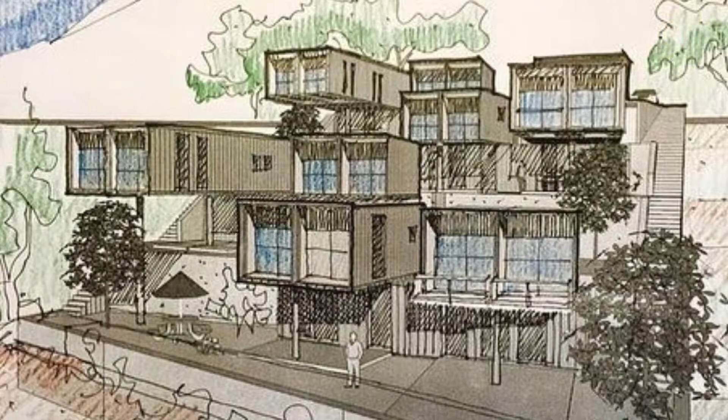We have with us today architect Madhav Joshi, the founder of an architectural and urban planning firm based in Pune called Architect Madhav Joshi and Associates. He graduated in architecture from BKPS College of Architecture, Pune, did his post-graduation in urban planning from IIT Kharagpur, and then established his firm in 1998. His firm is a hub of architectural creativity, designing projects that explore new frontiers of contextual modernism as a consciously adopted approach rather than a style.

I'm actually pleased to put the emblem of College of Architecture, which is a deemed university now. You are blessed with a wonderful campus. I mean, at one time...

You can consider this as the beginning of my presentation anyway. It's not going to be very formal, loaded with a lot of terms and terminologies of architecture.

I tried at both the places, but in the interview at JJ, I don't remember who was there, but some of the terminologies I was not familiar with, such as what is RCC, what is an eave, and what is a rafter. Some questions were asked and probably I failed because of that. But nonetheless, I was lucky to get admission at BKPS, and I carried on my quest to study architecture there.

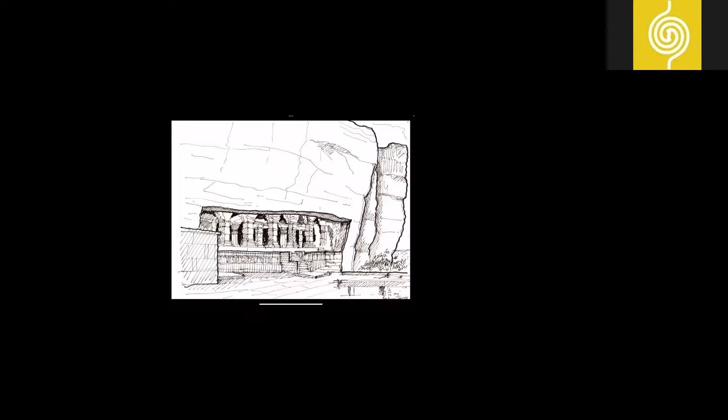Then you travel - this is Badami - and you're tempted to do your own documentation by sketching. Photography is one way, but sketching takes you to another level because you try to connect and get challenged by what was created earlier. Mere sketching is difficult, leave alone doing it again, but that leaves you inspired when you leave that place, and you come back with greater challenges in your mind to create something better nonetheless.

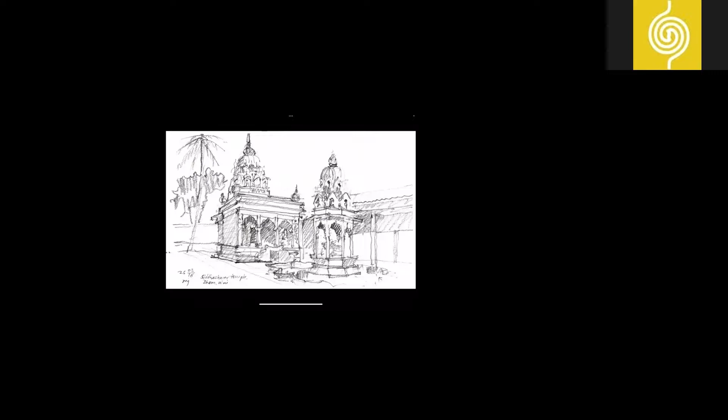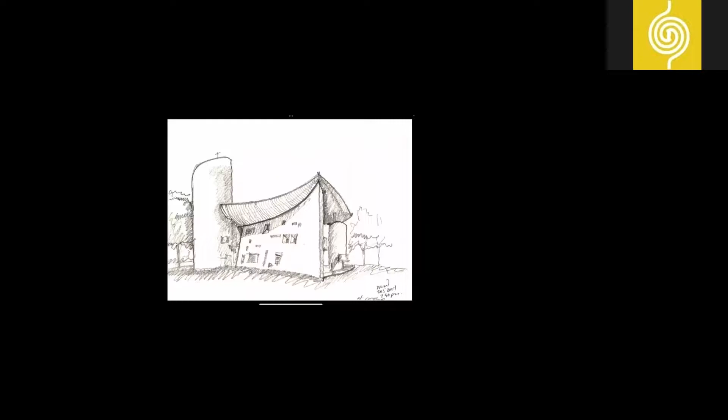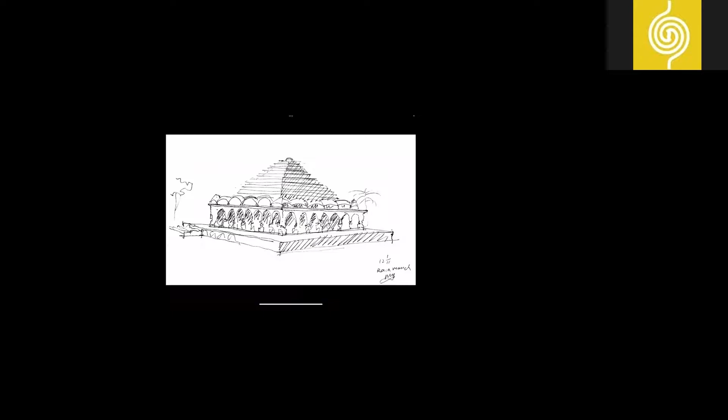This is everybody's dream, to go travel and see these wonderful buildings once in a lifetime, and when you go there, you can't come back without a sketch. When you sit there and start drawing, you realize how wonderfully it was crafted and designed.

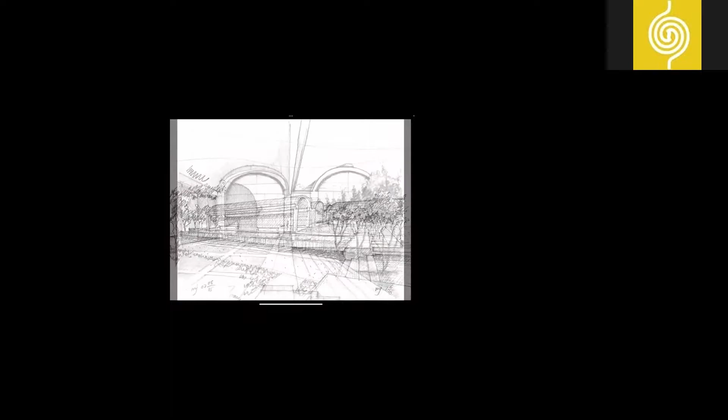This is Salk Institute by Kahn, this is Kimbell Art Museum, this is Carpenter Center. So likewise, you travel, you tend to sketch, and you consolidate your notions about those buildings which you've mostly seen in magazines and books. But seeing them and experiencing the spaces corrects all those notions in terms of its space, its scale, and if you're able to sketch it down to reasonable proportions, it's a very happy conclusion to that entire quest of exploration.

With these learnings, when you start designing certain projects, you're always in search of a concept, which I refer to here as the birth of an idea. For example, there was one project, a weekend house in the outskirts of Pune, with wonderful surroundings. For a weekend house, why do you go there in the first place - because you want to connect with nature.

We have an interesting process in our studio where at the end of all this design, or at the beginning of the design discussion, we try to capture what we want to do in a one-liner as far as possible. So here you'll find one-liners for every project, which in a way talk about the USP of that project.

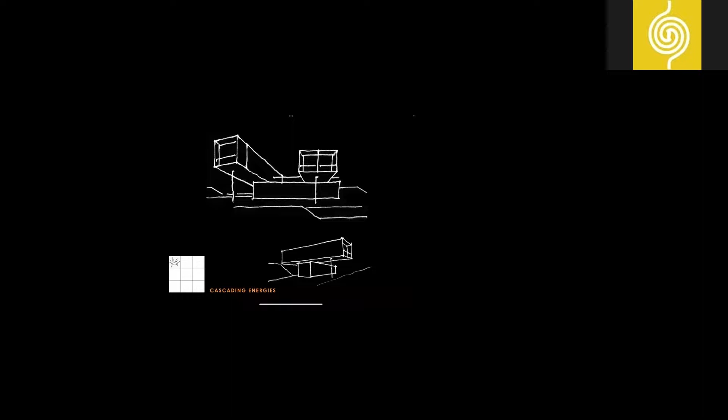Or for that matter, some other project where we are going to deal with extreme difficult slopes, and it was going to be a place for youth. We thought this would be a wonderful way to capture that idea, which is cascading energies. And that's manifested in the design.

Or for that matter, when you are asked to design a campus in a pristine setting which doesn't have very glamorous views or a seafront or dynamic views, but simple hills and undulated terrain around it—that's all you have to respond to, and that also has a lot to offer you.

But the important realization is that you're going to intervene into that pristine natural setting. So instead of looking at your building as an object which can stand out, you want to look at your architecture as an object in the landscape itself. Ultimately you want to intervene and give back to nature. That was the notion one started with on one of the projects.

Or for that matter, if you're doing something in a larger campus with a set of buildings, we thought we are working within a larger campus and we actually want to create a precinct within that campus. So a campus within a campus, or a precinct within a campus, was the tagline for one institutional project.

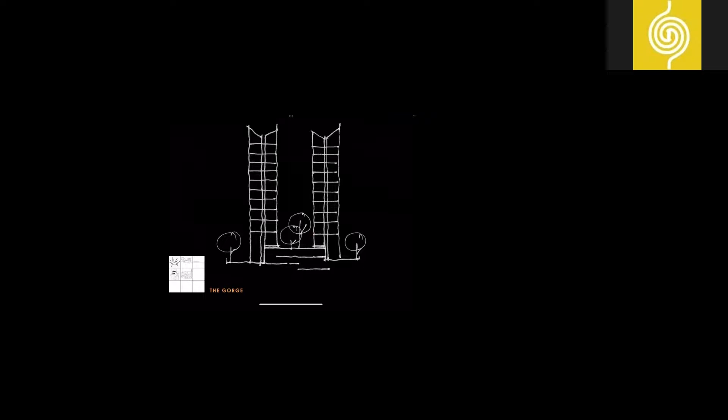In urban context there are residential towers, and what happens at the bottom is the public areas or the podium, which can bring public life together. So this is the gorge that we are looking at, and these are the high edges of the cliff.

Or a simple thing like how you arrive at a place also defines the entire experience, because that is where the experience begins. So for any building, arrival is very important. But here we wanted to highlight it because we are dealing with a campus with buildings of two different purposes—one a hotel building and the other an office building—and both wanted to have their own identity in terms of arrival.

So delineating the arrival was the guiding line when we started organizing the entire campus.

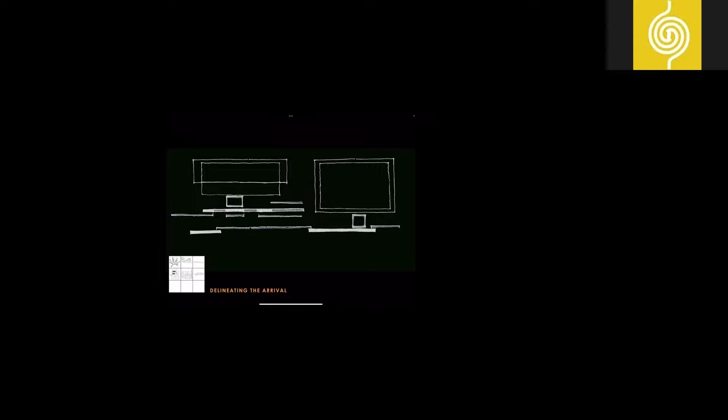Creating an urbane workplace is a very common dilemma. Nowadays we can see the skyline of Bombay changing rapidly, with taller and taller buildings coming up. But there was a time when we started designing a large mixed-use development on 12.5 acres, and the question was whether to go high-rise or horizontal.

On the left side is the hotel building, shown proportionately in terms of building bulk compared to what would be the office space. The choices we exercised, and why we did what we did, are represented in this diagram.

If you focus on the hotel building, this is what happens—the hotel would not change much, but the office buildings could. We wanted to give office areas equal importance as the hotel without letting them dominate the entire proposition, and to bring the space to a more humane scale where people can relate to its surroundings, instead of intimidating them with taller buildings.

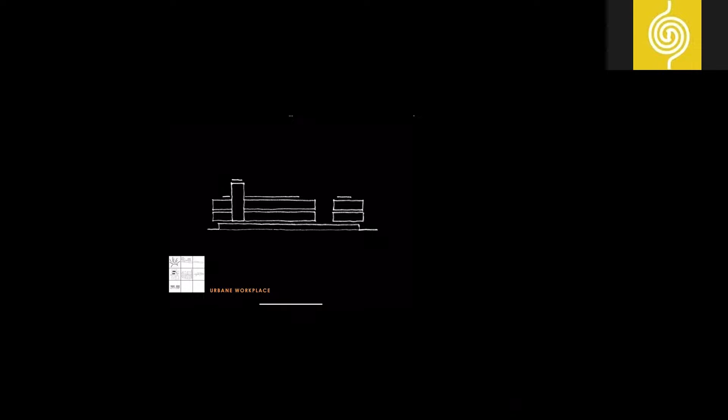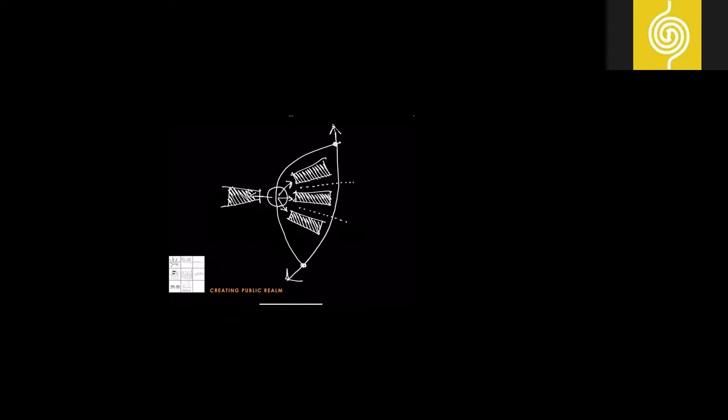When dealing with a larger urban design exercise, like creating a city center for Pimpri-Chinchwad, this was the idea we put on paper first—creating the public realm. That is most important, since this is going to be the destination, being a city center.

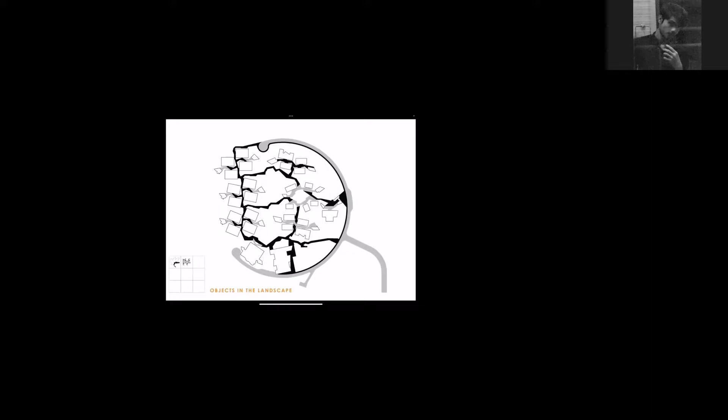So these are conscious attempts to organize the spaces with these thought processes. Traversing is another key element in that process.

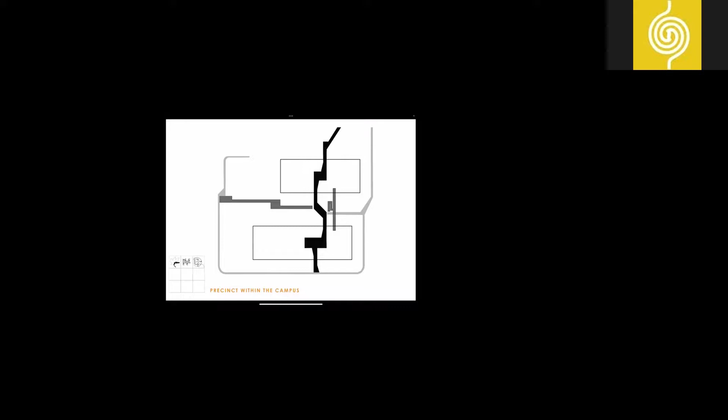Or for that matter, within the campus, when dealing with existing campus, there are surrounding roads where you want to bring people from vehicular movement, or traversing through, with universal accessibility for pedestrians coming from various directions of the campus. Or community clusters, which need to be connected through and through. And this is how the diagram emerges.

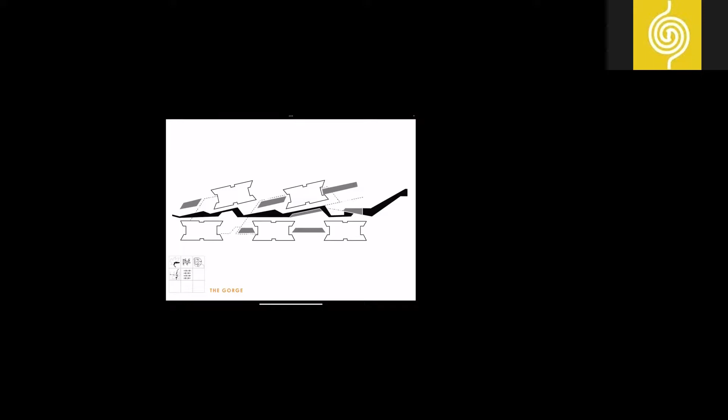The courts that we talked about—the space within the towers is going to be flowing, like a river or stream, with a lot of activity and interaction spaces. Or how you want to delineate the arrivals by putting these walls which define zones of arrival.

Or that large urban workplace where the linear arrangement of the masses defines the overall connectivity pattern. Or for that matter, the city center is more radial because the site was such, and you want one major arrival area but connect to various other points. There are multiple drop-off areas, being a large 35-acre site. So finally, you want to bring people to one particular node from where distribution within the building can happen.

So it's all about organizing man and material movement, vehicular and pedestrian, but there has to be a definite pattern and thought process behind it. We are just trying to capture that more graphically here. When you look at it collectively, this is how the traversing patterns look for various projects.

And this is a very important aspect, the built and the unbuilt. I always believe that the unbuilt defines the built, and we can talk about it more as we go ahead. But here, what is built is the dark portion; what is unbuilt is largely yellow or gray.

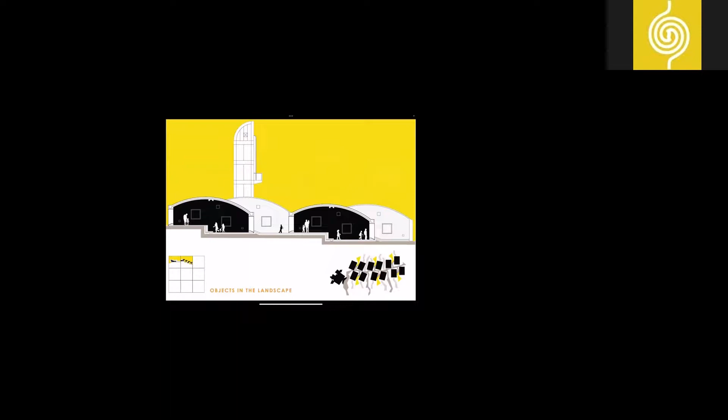And that's true in all the projects, like maybe in a school campus or a backpackers hostel campus or the institute—how people, these are the work areas, and how they are connected, and what happens in between, or how the traversing happens, or for that matter, in the housing areas.

So each of these projects has a definite notion about the built and the unbuilt. For example, if you look at this large space, the large podium space you can see here is a central organizer of the entire place. If you see in that key diagram, this is that space.

It's a large 4-acre podium area, a landscape garden which organizes all these buildings around it—these are the two office blocks and the hotel block. But this is a common central place which defines the entire organization.

So when I say the unbuilt defines the built, there's a conscious call to keep certain areas unbuilt, or typically, a house around a courtyard. The idea of keeping a courtyard is fundamental, and then there are various possibilities around it.

Or for that matter, in a city place, to create open space for people within the building blocks is important—that's a conscious effort, and around that, the built is defined. These are the traversing routes as you saw earlier, but this also gives clarity on where the building blocks are to happen.

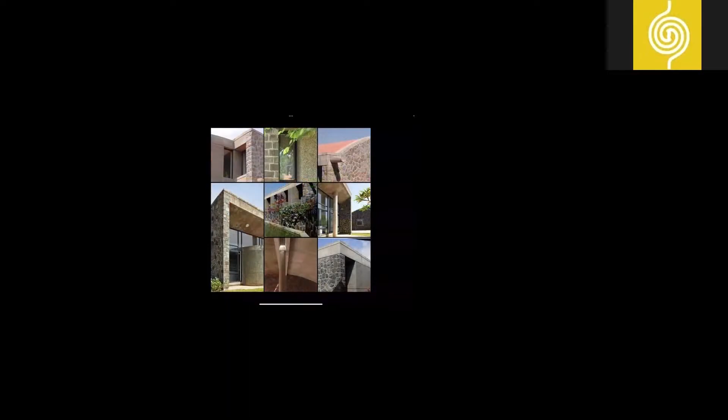We've been dealing with a range of materials, starting from handcrafted stone masonries to industrial elements, or the more modern interpretation of shutter-finish concrete or metal, or good old plastered, rough-textured buildings. What matters is how we look at the fenestration, the interface where different materials come together, and how shadows play an important role in the juxtaposition of projections and recessed elements.

Or for that matter, different materials like water or landscaping — because landscaping needs a very neutral backdrop, and it can do the rest of the drama. Or the new-age materials which have arrived, and which we have to respond to and use very carefully.

So just to summarize, this is what we've been looking at through the examples. All these colored images are what we are going to talk about in detail as we proceed with this presentation. So the first one is capturing the horizon.

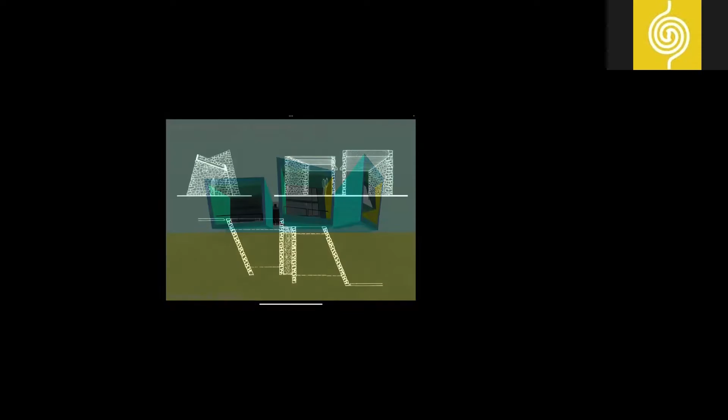It's a weekend house. It's interesting to note that this is my third-year sketch of a larger project, where we were asked to design a city garden, a city park, and this was the entrance gate to that park. There was a small idea about this. Many other objects were designed in that project exercise, but this one actually captured my imagination as I looked at this project when we started practicing.

This entrance gate has simple load-bearing walls juxtaposed at two opposite angles. Looking at it from below going up, from the left-hand side you see a larger picture of the garden, whereas from the right-hand side you focus onto a certain object in the garden. Imagine a kid approaching a park like this — they'd have a choice of going from this side or that, and they'd get a picture frame of the same destination with two completely different frames, which triggers interest before they rush into that area. These are the small things that work on a human mind, which architects are capable of introducing, and that experience of arrival becomes that much more interesting.

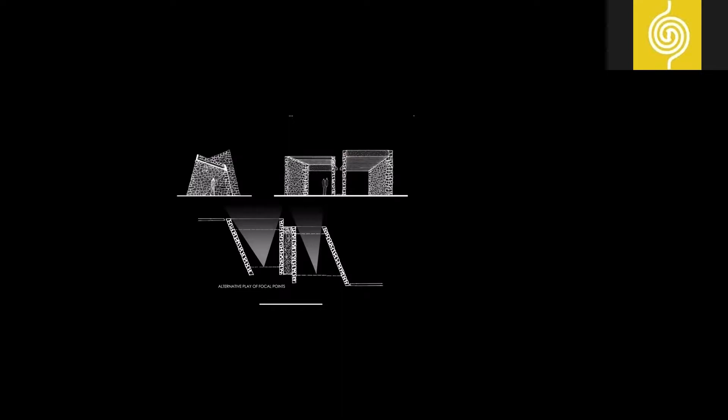We thought this idea could be developed further when responding to this program — we wanted to increase the sky space more, and that angle we saw earlier would offer, for example, this angle. Can you see? And the plan also. There was a view all around, and from every room you could have a wonderful view, so the diagram came about to capture everything around that site. This was the first sketch, looking at the site from outside the site.

That's another way of looking at the project at hand. Normally we look at the site in itself — we study extensively the contours of the site, we study extensively what the program is saying about the site, but very rarely do we see the site from outside. So we thought it was a wonderful idea in a project like this to look at the site from outside and see how best one can respond to it.

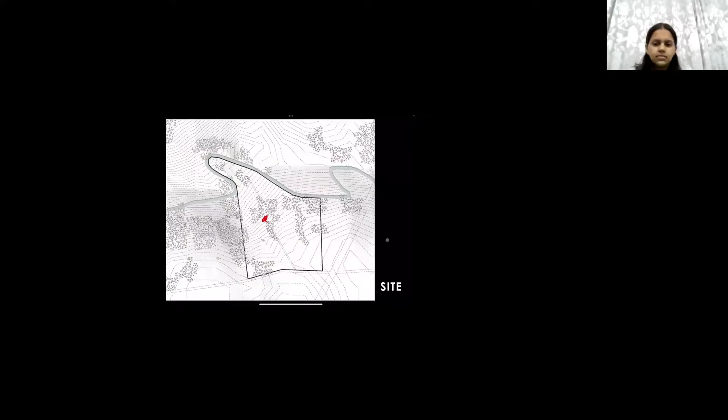So this was the site which was comparatively at a higher position compared to the rest of the farmland. We thought this is the best location because being at the top, the topsoil has already eroded and it's not good for cultivation as such. It would also command a better view into the surroundings. That's how we selected to position the house at that particular location.

So this diagram sort of shows it. There's a gradual slope ending into a small valley, kind of a swell where there's a seasonal flow of water. But otherwise, there is no obstruction of any objects, and you can see till the horizon. That's what you want to capture in the picture frame.

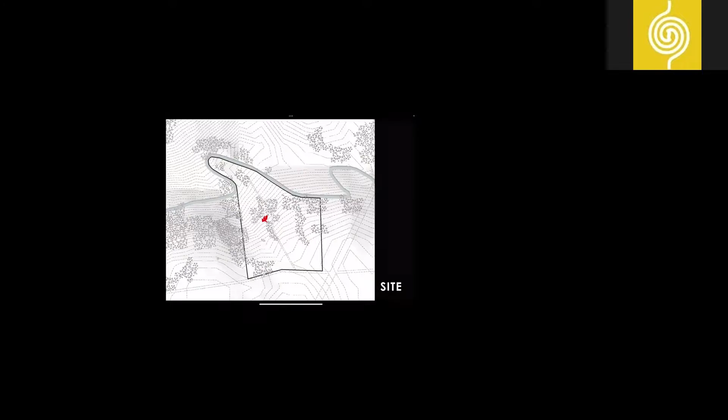And this is how the diagram actually emerged. There's one slide missing, I guess, which talks about how that process came about, but okay, it's there. So starting from the initial sketches on the side, slowly you start to try to make it more and more rational.

The geometry of the plan and the volumes is held by a helical pattern, which establishes a rhythm between the independent moving lines. One wall of each space stretches longer, ensuring visual privacy between the spaces and adding to the visual dynamism of the masses.

Existing trees were marked and spaces were arranged to fit in snugly in the landscape without felling any of the existing trees or plants. So there are localized impediments which we have to respond to very cleverly and accommodate, such as trees. Having a wonderful, fully grown tree is a blessing for any site.

So we should think about how we can work around it and try to make it part of your idea. Likewise, the diagram evolved, and then you start in the search of a geometry, putting some angles and giving some definition to the whole arrangement, and that's how the plan emerges.

So it's a simple house with one living room or lounge, which has got a pantry or small kitchenette supporting it, and there are two bedrooms, which have attached toilets. All of them have a view outside. And then this is the traversing line you can see here, which sort of connects all those spaces.

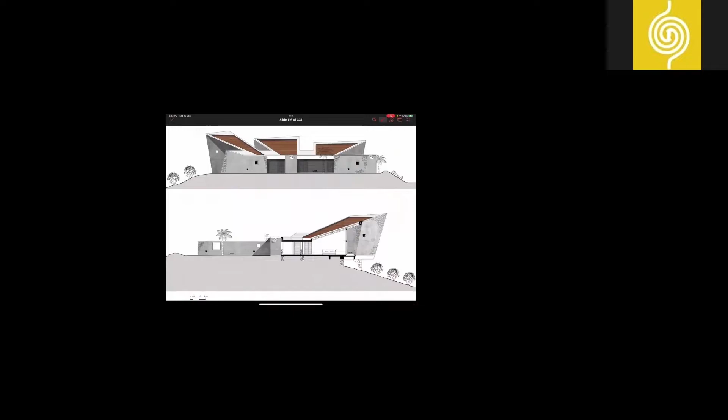In fact, we did not do the formal section and elevation drawings that you see now while we were designing. The entire design was worked upon with the help of a number of models of different scales. This was one of our early projects where we wanted to explore certain geometries of built form in response to the site.

From a construction point of view, the load-bearing walls are purely corbelling-based walls. So this is not cladding; these are load-bearing walls, and they are corbelled out to achieve that profile. That profile is created because of the views on the west side and the southwest side, which is the most severe side in terms of the elements coming onto it, like rain and sun, and those projections actually help to protect the living spaces from that.

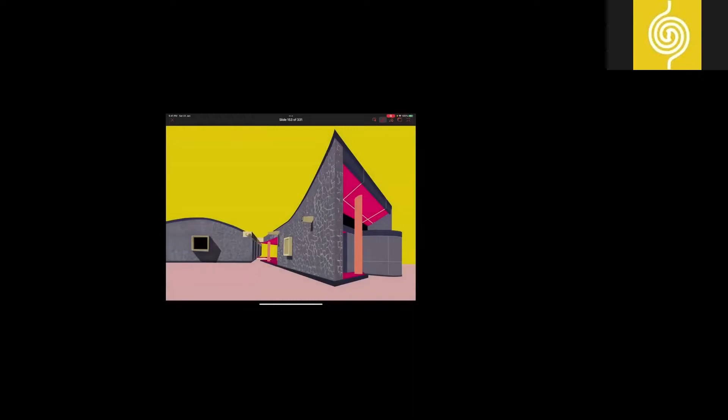Now, when we designed this project, first thing we did after looking at the site from within, we also looked at the site from outside the site.

But when we started traversing around the site and into the immediate context, we realized there are these small hills and hillocks one is surrounded by. You can actually trace the character of those landforms, which is very interesting. For a human scale, they're quite big—at least 50 feet tall when you're standing in the lowest part, so they do matter to human scale. Not that you always need a view of a mountain, but we had one hill with a very peculiar characteristic that we noticed, with interesting forms.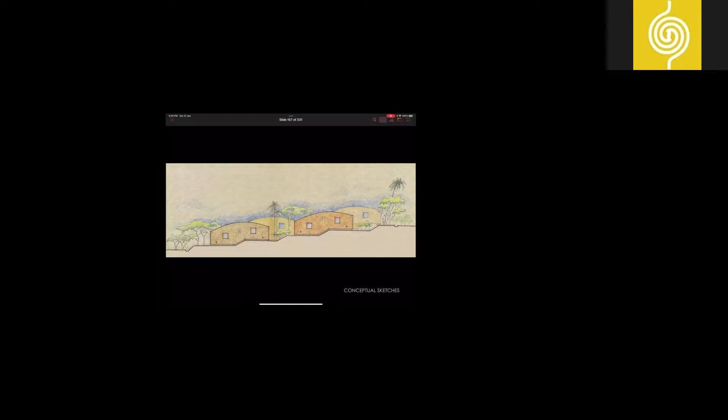Not everyone comes from a very comfortable background—some have disturbed backgrounds, and there are various reasons why parents want to keep students in a boarding school. So there are many psychological aspects one needs to understand, and in some way you can help them make their stay more comfortable. That's your responsibility as an architect.

Now, when looking at the various building requirements, the overall requirement was to accommodate about 200 to 250 kids. It's a small school, a CBSE program, but they wanted a 1:25 teacher-to-student ratio, making it a very compact scale of campus.

Just to substantiate what I was talking about earlier, the form matters more than the materials. We initially thought of plastered buildings with pastel, earthen colors, but the management thought it could be difficult to maintain if kids play ball games there, leaving patches of mud on the wall, which to me was quite okay and could tell a story, bringing interesting character to the place. But they thought it would be difficult to maintain, so we translated that materiality to locally available stone eventually. But the form, which was the key driver of the entire exercise, was most important.

That's how it responds to the context, and in a way mimics the terrain around it. This photograph was taken very early, where you can see the tree saplings just planted and about to establish, but now it's overgrown and you can't see much of the buildings. Some of you must have visited it already.

These were some of the sketches. This is a setting within which... if that hilly surrounding was one reference, the peculiar hill that you will see was also another reference that we have juxtaposed with this form.

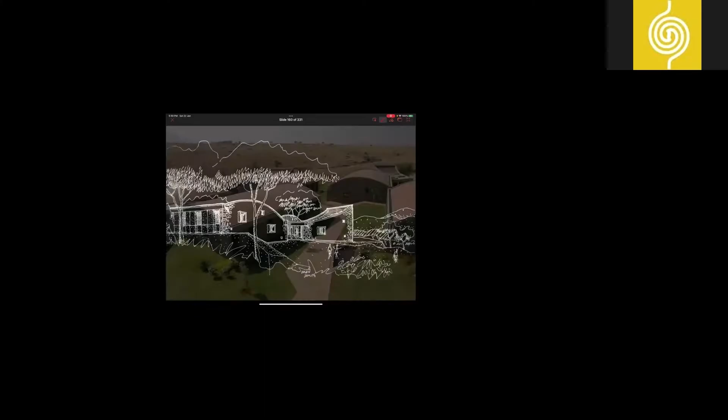And some more images of the campus.

Now this is very interesting for the first year, second year students as well, as you would have used the term building vocabulary, or the vocabulary of architecture. How that comes into a place is very important. When designing a campus, you need uniformity in terms of built form, because it's a campus, it needs to have a character of its own. So instead of looking at material as a binding factor, we looked at form and its derivations as the key to creation of the built form vocabulary. This was the genesis of the entire process.

This dormitory block was situated on a hilly slope. With each footprint of a dormitory block, we could negotiate 1 meter of the level difference. We didn't want to create deliberate terracing and kill the natural challenge of the site, but instead wanted to take that gradient into the stride of the design and respond to it cleverly, bringing some interesting possibilities.

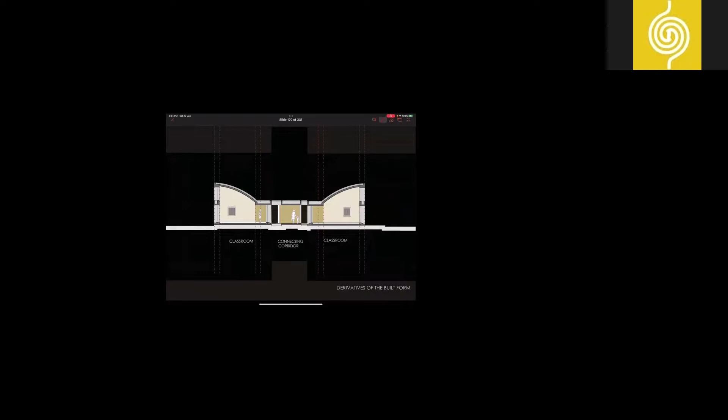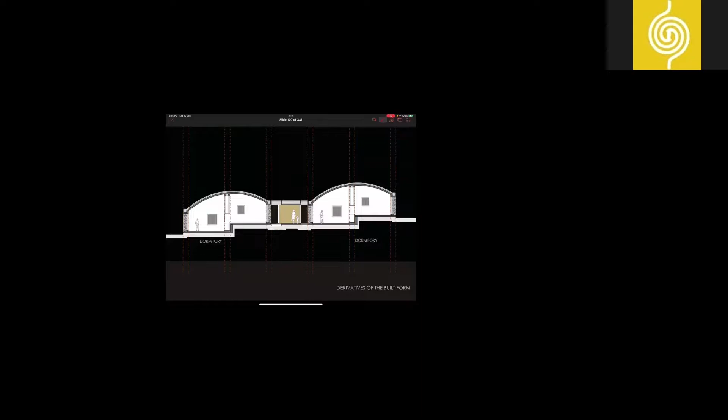The yellow patches which are added, and you still have to repeat these build forms. Therefore, there has to be a set of shuttering, very specially designed for it, which should have a repetitive use also. So you can see there is a definite grid, rhythm of a grid, and modularity about it. You can use those shuttering sets anywhere to build any of the buildings on the campus, giving you the possibility of expediting construction, and also opening up different construction fronts, because you have a material which can be adopted for any of the buildings.

This is a laboratory where we used the reverse curve, because the volume wasn't very important here. We wanted to create a space with good daylight, and that kind of arrangement juxtaposed with the convex roof gave a very good punctuation to the entire build form. Now, you must have read about what Louis Kahn used to say.

He used to always talk about every building having servant spaces and served spaces — spaces which serve the larger spaces. Taking that literally, you can see all those low height areas, like connecting corridors, are actually serving the larger spaces. So in the end, you have a definite legibility to the entire composition from that understanding as well.

What you see on the left and right are small dwarf volumes plugged into that opened facade or open side. These are small plugins, like ancillary spaces which are also part of servant spaces, but interpreted differently in order to play into the entire composition and positioned appropriate to the functional requirements.

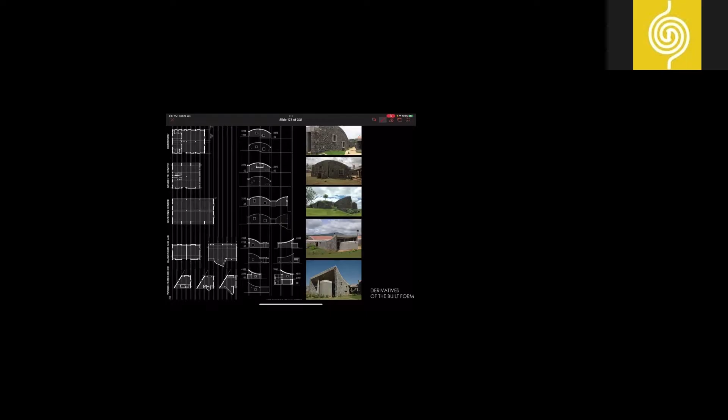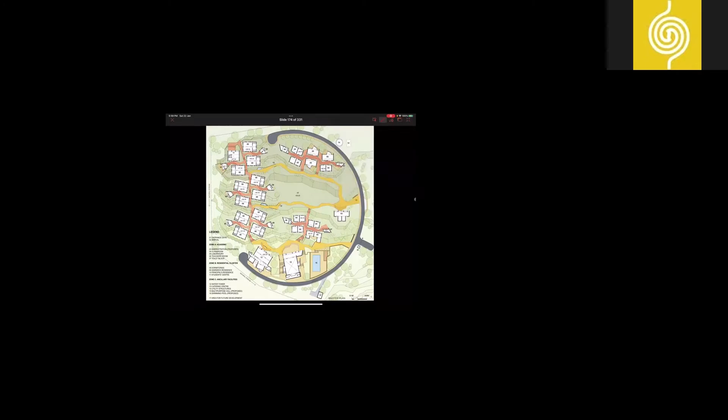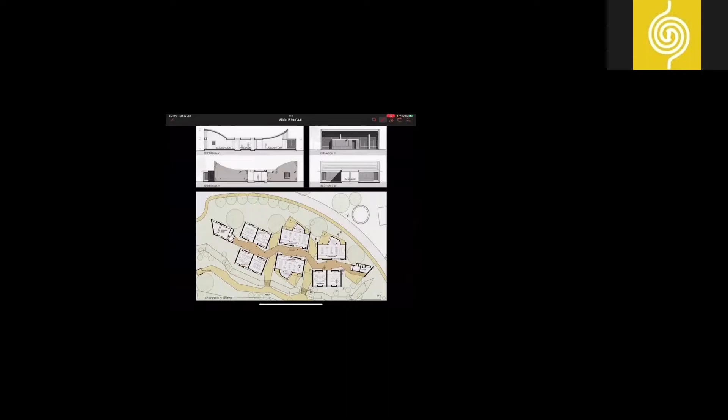You can see the classroom, the quality of light. You can see the area on the right-hand side, which is the student center, which is the only building that has got a mezzanine, which has got an interesting activity area at the mezzanine level. On the top, you can see the face of a classroom block, which has got more exposure and a different scale compared to the residential blocks.

Now, these small plugins of the laboratory building that I was talking about create a wonderful arrangement of volumes.

And mind you, these are all load-bearing walls, and we did not use computers. These were hand-drawn drawings at that time, and we had to commit to certain geometries right at the footing level.

And the passages actually take you till the doorstep of the classrooms. Alongside is the landscape strips, which actually give you company till the door of the classroom, and that's a very wonderful experience. So the same volume as that of a dormitory, when subjected to a very severe terrain, you convert into an opportunity.

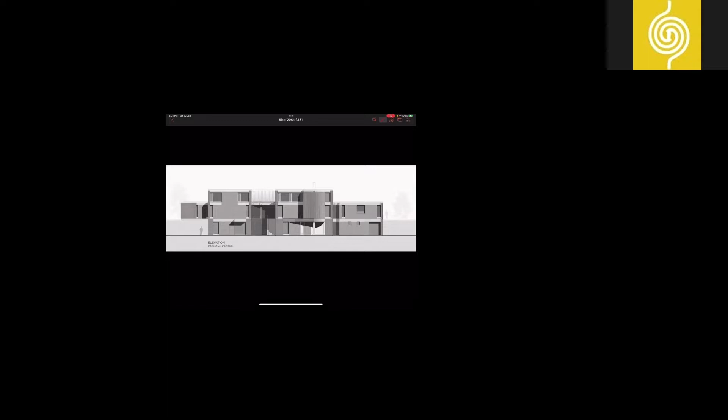So certain compositions or elevational patterns have actually happened because of certain responses to the site situation, and that's how this particular block of the catering center has come about.

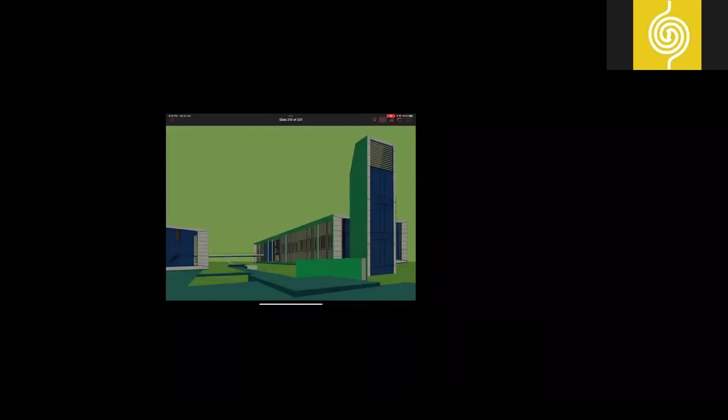Now I'll quickly move on to the precinct within the campus, which is the Center for Climate Change and Research at IITM Pune. This is the institute situated in Pashan. So we were designing a campus within the campus, as I talked about.

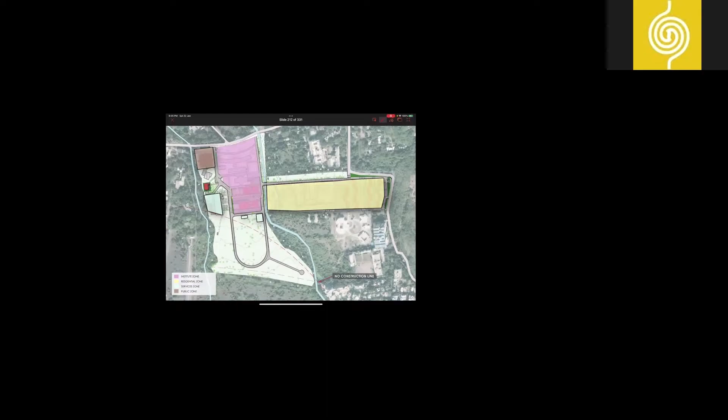I'll just run through the essentials because it has got certain things for senior students, about utilities and infrastructural requirements.

So this was a surrounding which had hilly areas on all sides, and there were two areas we worked upon. One is on the left-hand side, the HPCC and CCCR institutional area, and on the right side is the residential cluster that we'll be looking at.

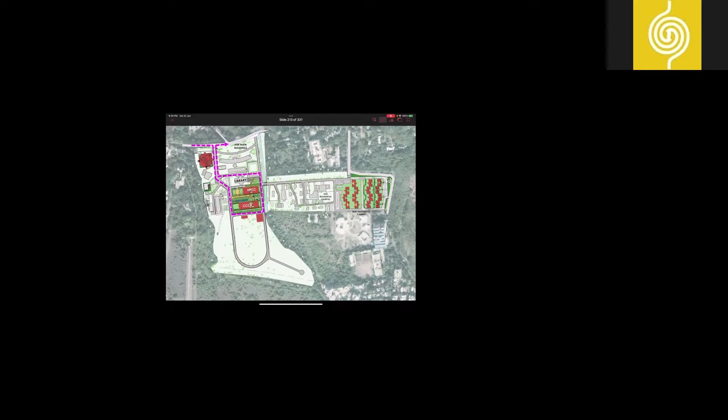Some of the routes of arrival for vehicles, some infrastructural nodes, how the power supply comes in.

This is a district within the city which is predominantly surrounded by central government-owned institutes, like NCL, Armament Research and Development Establishment, and IISER, a science institute across the street. So within this district of institutions, you are intervening, and also thinking about what kind of architecture in response to the particular requirement and client and user group you need to bring about. We'll see that shortly.

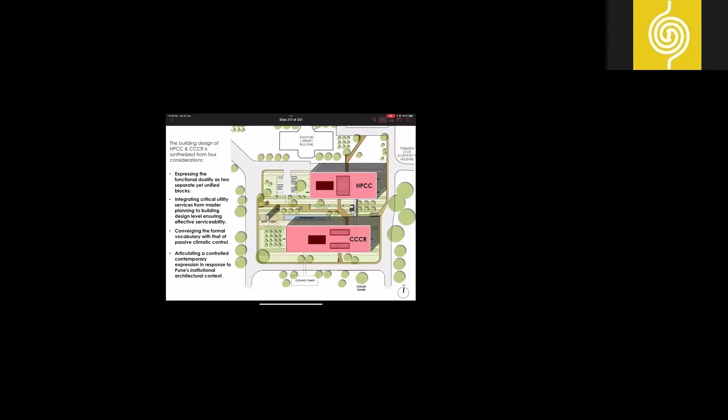These two buildings came in phases, sequential with a difference of two years. HPCC, the high performance computer center, came first, and the Center for Climate Change and Research came later. But we had conceived them as one precinct, organized around a plaza which we fondly call the climate plaza, with surrounding areas giving access to the entire precinct from the residential area or the existing institutional area.

The first and foremost consideration was the response to climate, and with understanding of the orientation, we wanted to reduce heat gain as a fundamental aspect of solar passive design. We wanted to reduce exposure on the east and west sides, from where you normally get maximum solar radiation, and in order to reduce heat gain, we derived a built form that is more rectangular and linear.

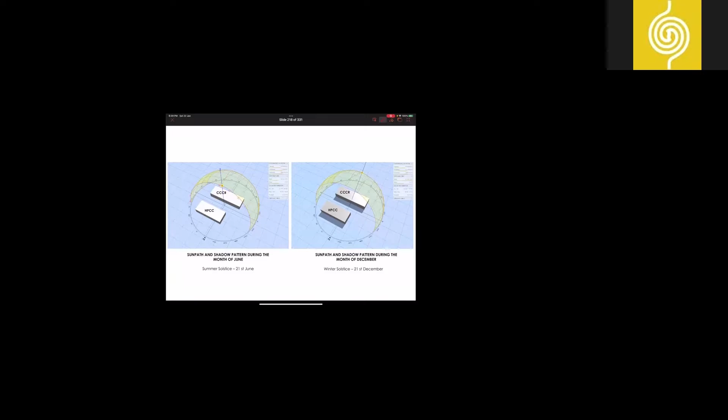The strategy was to reduce hard surfaces in order to avoid any heat island effect, so landscaping plays an important part. The unbuilt space between the two buildings was deliberate, because it was the organizing element of the entire proposition — the plaza around which the buildings were to come.

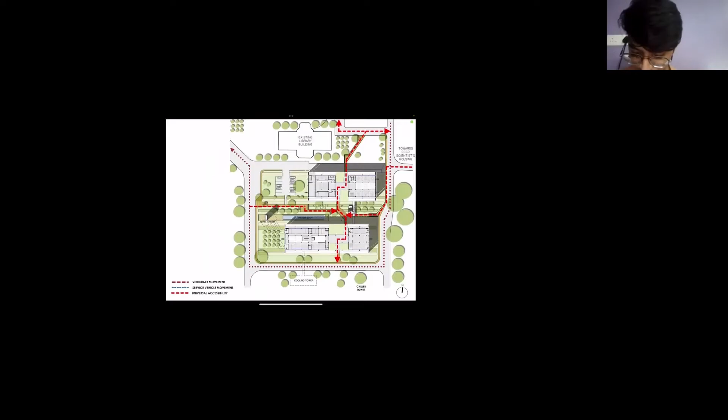So this existing building was there of the library, and there was a cluster of these bottle brush trees here. So we had an opportunity to take an oblique route from here in order to approach this side. And you arrive in the central foyer, which is like a large veranda and a courtyard, from which you enter either side of it. Likewise, you continue traversing and arrive into this zone, and you can either go into the office areas or to the computer side on this side.

The idea was to keep this area, which is largely introvert, being a computer and seminar room, because no one needs to look out into the immediate landscape. And even if they look into the backside of an existing building, which is all right, but the work area is actually positioned in such a way that you can look into the garden created by your own. So these work areas are subjected to better views and better cross-ventilated zones.

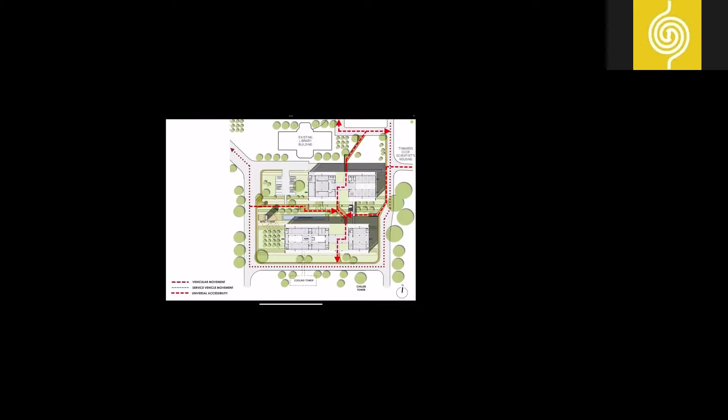So there are smaller instances like these which make that overall traversing experience and spatial planning more interesting. You must have seen Johnson's glass house. It's a small house in a large plot, but he had taken an approach which is not perpendicular to the block, at an angle to the block. Something similar happens here by virtue of the existing trees, and you approach this otherwise rectangular form in an oblique manner. This courtyard actually comes as a surprise, and the serial vision gets more and more interesting as you start exploring as you move ahead. So these are the small events that we planned into the planning as well.

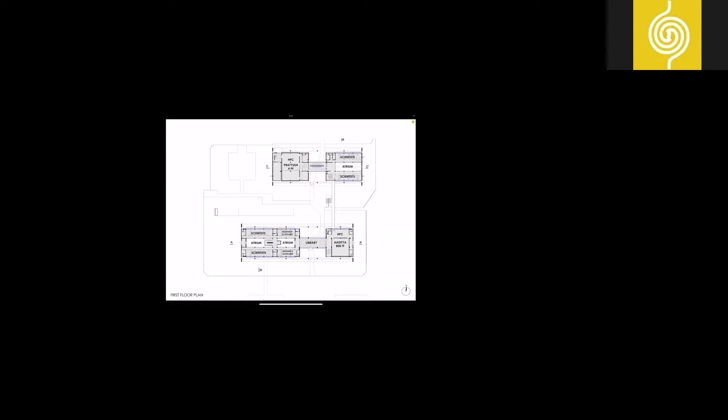So coming back to just running through the floor areas. The connecting areas are common areas such as library or conference on the first floor, or the laboratory. Now, lobby and passages, the circulation, lift and staircases — so how they are positioned at each level. You can see the diagram is very simplistic, the spatial diagram.

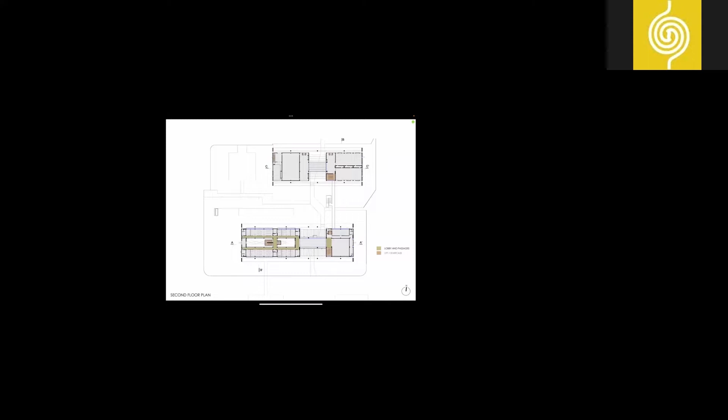East and west walls are like cavity walls, and there are buffer spaces you can notice, so that the work areas or the habitable areas are further protected from these buffer areas. And the HPC building, which is on the right-hand side of the upper diagram or the left-hand side of the lower diagram, does not have air conditioning at all. It is purely based on cross ventilation. That was the first phase. And second phase, in order to add another feature, the CCCR building is equipped with radiant cooling, which I'll be talking about as well.

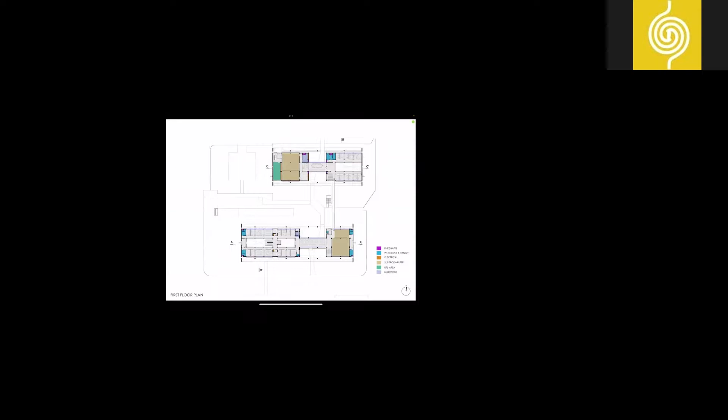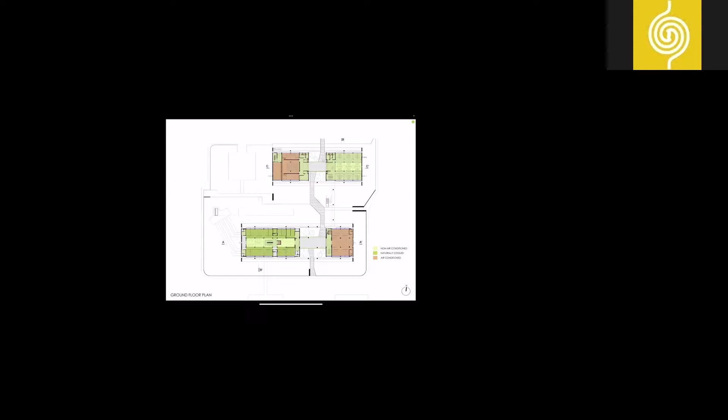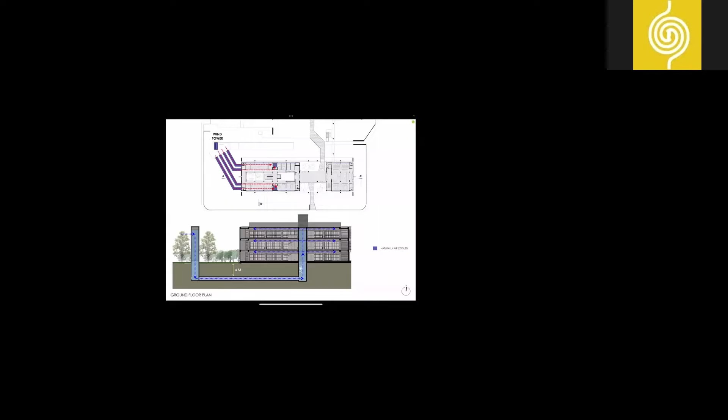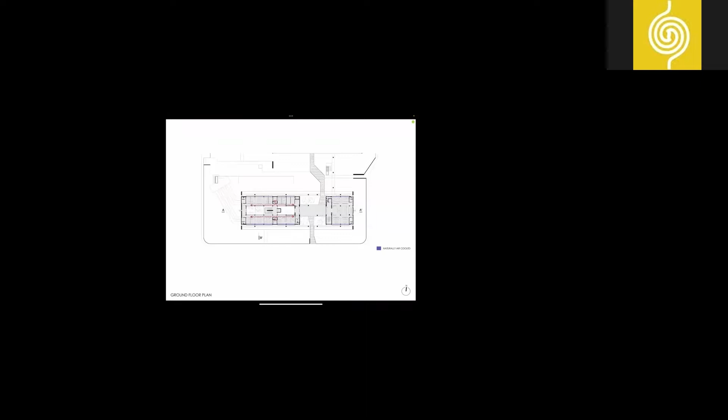And this is an atrium which helps to escape the used air out into the atmosphere. So this is 100% use of fresh air into this building. These ducts, hatched in blue, are the horizontal plenums which bring in the pre-cooled fresh air, and it is dumped into the work areas and taken out through the central atrium.

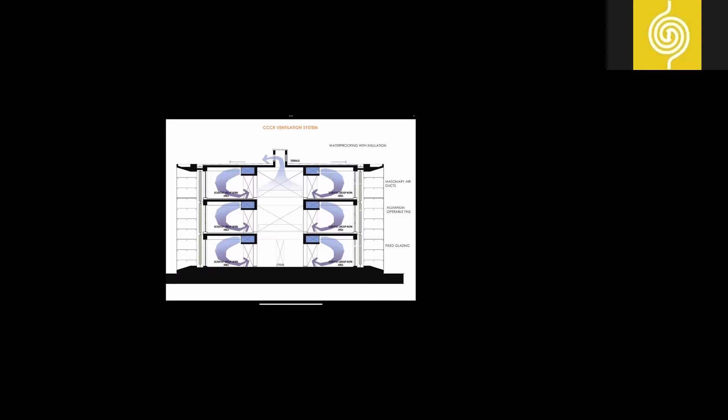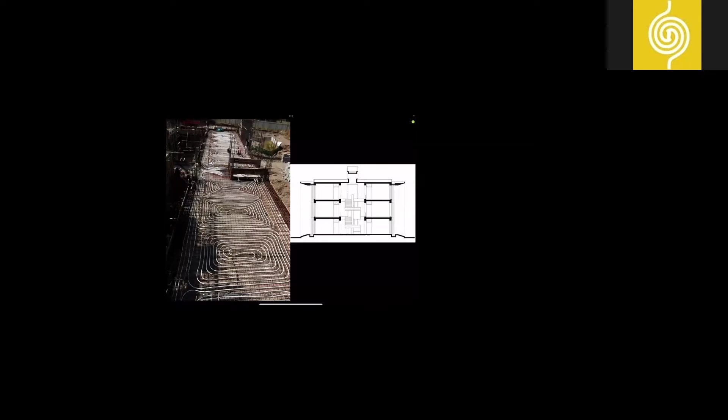The radiant cooling is, as some of you may be aware, like putting chilled water pipes into the slab while the slabs are being poured. So the blue markings on the right-hand side show all these levels placed with radiant cooling pipes. We designed all these loops you see as different modules which can be switched on and off according to need. So it is modular in that sense, and depending upon occupancy, you can articulate the actual usage of the system.

And this is the photograph while the work was being done.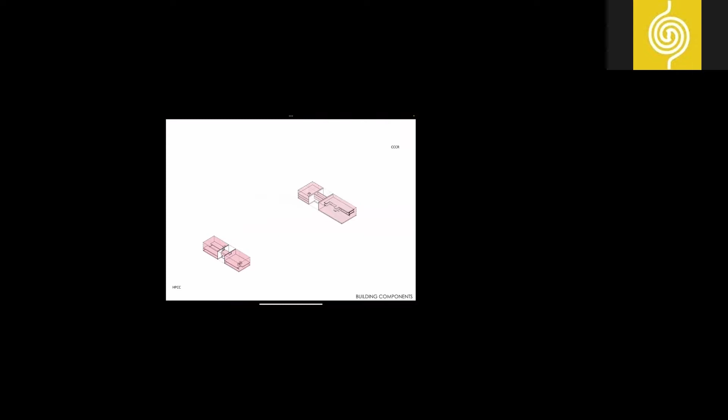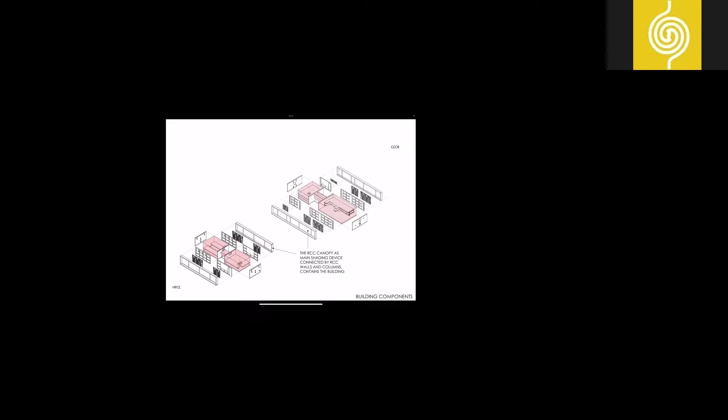On that building, you can see these core areas which are actually habitable areas, and how the building envelope has come about. East and west sides are the cavity walls placed at the gable ends to block solar radiation. Large openings maximize natural daylight and facilitate cross ventilation when required. Manually operable aluminum louvers adjust shading and flow of air. The RCC canopy is the main shading device, connected by RCC walls and columns that contain the building. Roof parasols create shading from the top, with connecting elements, the wind tower, and the cooling tower on the upper right corner.

Then of course you have to take care of winter sun and summer sun. Then the atrium, which helps you cross ventilate the entire place.

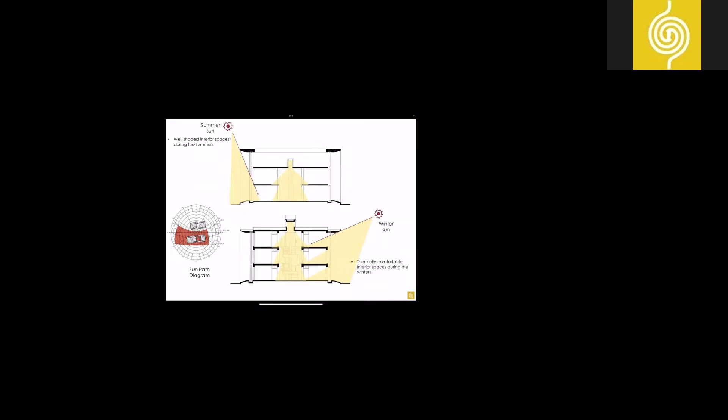This is how different patterns get created, because every user in that particular space can arrange the louvers as per their requirement, in order to bring in more light or more airflow.

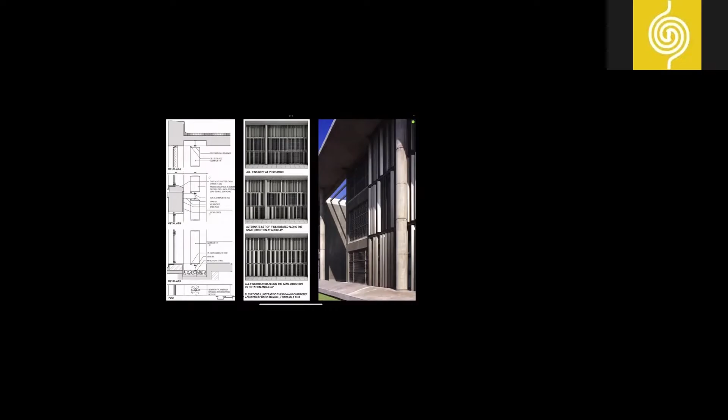These are the gable ends. This particular side is the west side, where you can see largely cavity walls with lesser openings, which protect the entire building from heating up, along with some light shading elements on top and other elements on the building.

And that's how the entire language of architecture comes into place. This is all shutter finish concrete, stonecrete walls, metal, steel with PU coating, and aluminum sliding windows. These are not double glazed windows because you're not going to be a captive user of air conditioning - you can operate the radiant cooling system in the CCCR building only on summer days or hot days, but otherwise you can just enjoy good old cross ventilation.

And being in Pune, you have the added advantage of the climate, and being in a campus like this, the ambient temperatures are going to be low compared to city temperatures anyway. So you consider all the contextual offerings, whether benefits or challenges, and convert them into opportunities.

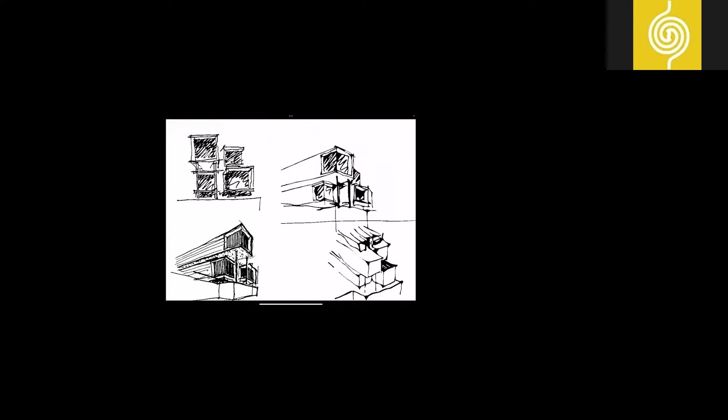This goes back to 2006, the initial sketches of how the build form developed. Initially there was a possibility of making a tall building or a horizontal one, and we chose very consciously to explore a horizontal built-up proportion, so that it's not very intimidating when you arrive.

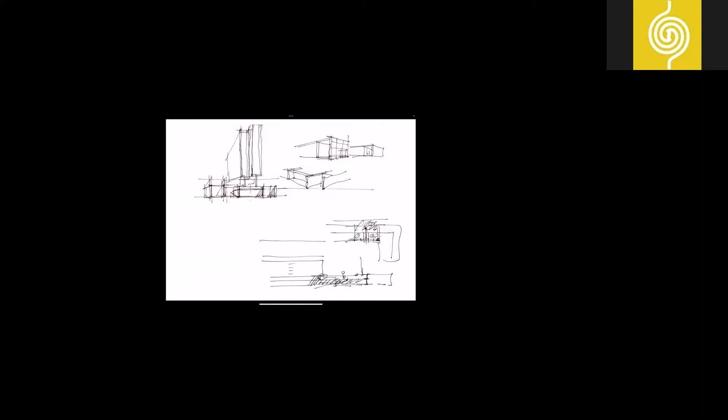Because the workplace, as I understand it, has to also be a place which is largely seen as a landmark in the city, and particularly the hotel building needs to have very good visibility, becoming an important address of the city for the kind of guests it will entertain. So it's a very complex set of requirements, and at the end of it, as a greenfield development, you have to establish something that would be a worthy introduction to the new age built form within the city.

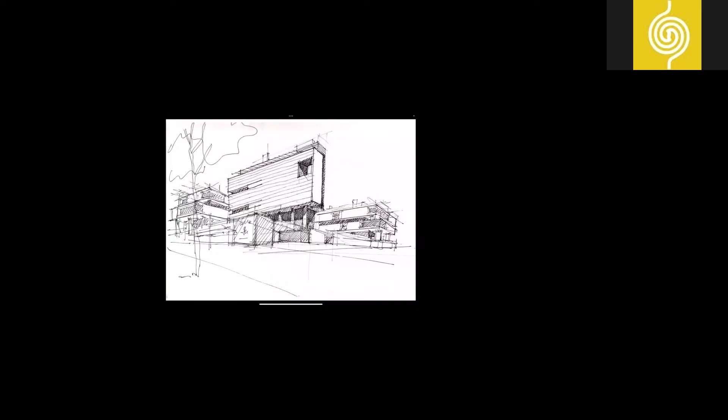Some of the initial sketches go back to May 2006, and then there were more formal, organized studies of the built form.

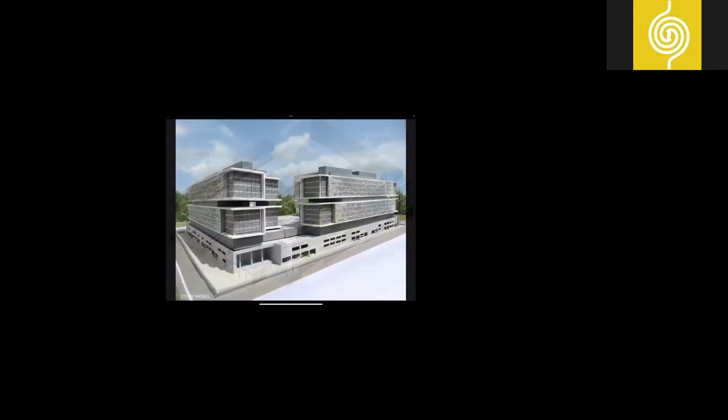The idea was to subdue the building bulk of the offices, which otherwise could have been a huge tower, by putting it horizontally, so that it becomes the backdrop for the hotel on the left-hand side. With the hotel on the road front, we wanted to push most of the office areas back into the site, so the hotel isn't intimidated by the scale of the office areas, and finally gets to enjoy a very important position in people's mind.

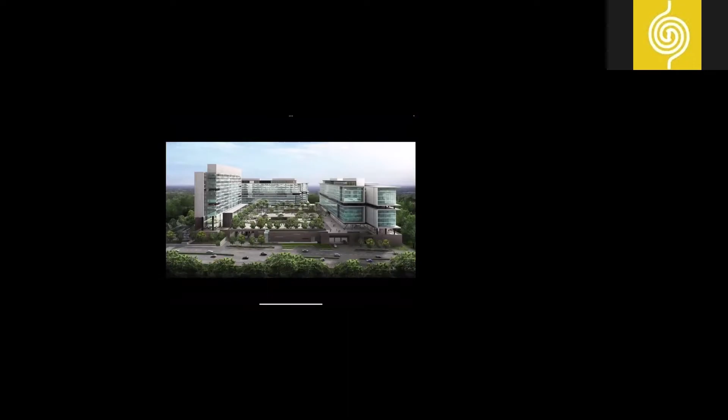Essentially, the central courtyard, a 4-acre terrace garden on top of a parking area, organizes the buildings around it. It's a very simplistic diagram for organizing the entire campus, but it's accessed by two different roads, and the interface with the city becomes a very important aspect when designing a project of this scale.

How vehicles arrive from which direction, dealing with peak hour rush, influx and exit of vehicles at different times of the day. When it meets city traffic, we need to carefully plan the interface between city roads and campus roads, and also take care of pedestrians and two-wheeler traffic. Here we could segregate pedestrians and two-wheelers so they don't conflict with cars within the campus.

So it's an exercise at multiple levels. You're dealing with urban design situations where traffic and transportation are very important, and how to integrate public transport drop-off with your arrival areas. It's very interesting, although complex. That's where I realized my understanding of urban planning came very handy while designing an urban design project like this.

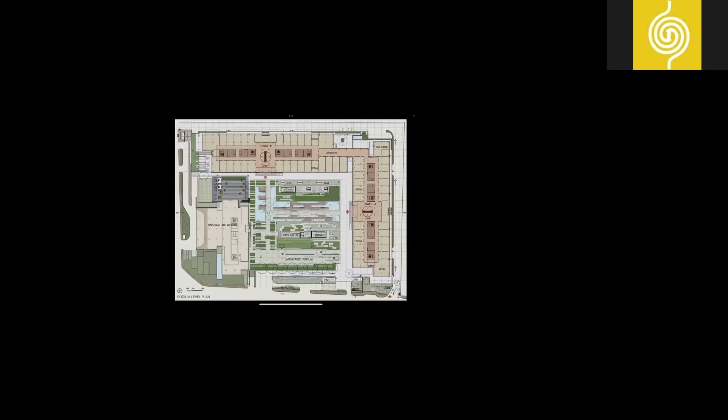Now, looking at the campus as such, the podium level plan was designed as a high-end retail area, surrounding the open garden, which is about 4 acres. There is also part of a hotel, which will be connected to this level, which will have banqueting, second level banqueting facilities, and specialty restaurants at this level.

The landscaping of this part was done by a very famous landscape architect from Lebanon called Vladimir Djurovic. He has been a very sought-after landscape architect, and we were quite lucky to have him on board to work on this campus.

It was an interesting experience, and he responded wonderfully to the overall language of the building mass and the language of its landscape interventions, as you can see from here.

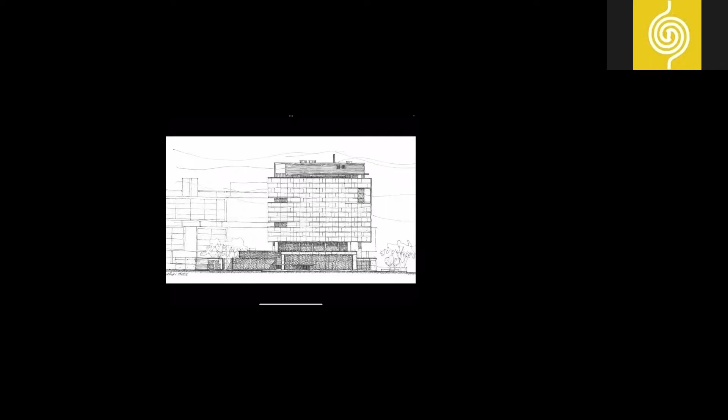This is the hotel block of that campus. These are some initial study sketches of the design, and how that entire mass can be broken down into a more palatable or more acceptable form, which can complement the office blocks as well.

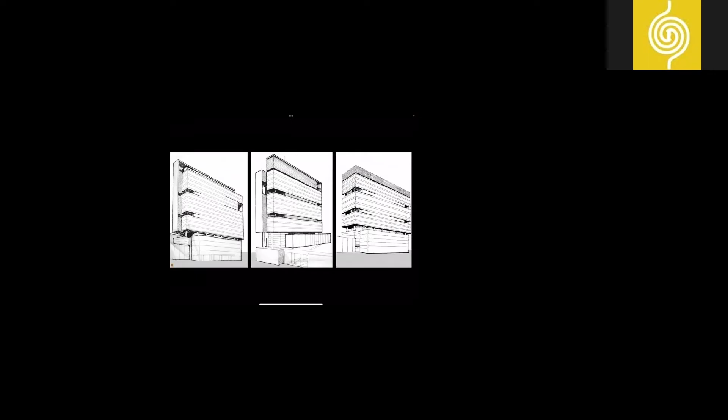So this is the Ritz-Carlton Hotel, one of the Marriott brands, as seen from the golf course. For this particular project, we did the landscaping as well.